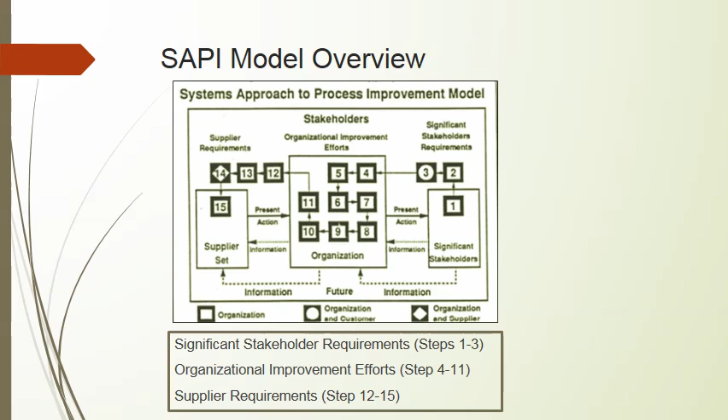So as Josh mentioned, the SAPI model is broken up into 3 distinctive sections. The first one being significant stakeholder requirements. And as he mentioned, we're going to be putting ourselves in Ford Motor Company's shoes and essentially walking through a year of process improvement that Ford might take to improve their F-150 platform.

So first of all, step 1 in the SAPI model is they need to identify and prioritize their stakeholders. Then they need to find out what those stakeholders' needs and wants are, and then develop operational definitions for producible quality characteristics. So when it comes to identifying those stakeholders, there's a number of internal and external stakeholders.

One being a primary customer, they're the end user. They're going to be the ones that are driving and owning the vehicle. There's the EPA, that's essentially the United States government Environmental Protection Agency. They have a number of requirements that they must meet from an environmental standard. And then there's the suppliers, for instance. They interface directly with Ford and provide the base materials that go into the Ford F-150.

So when it comes to, what does the customer actually want? For instance, they want a truck that's, 1, fuel efficient. It's got to be reliable. It's got to last a long time. And it also has to be safe. What does the EPA want? Ford needs to make a truck that meets emission requirements. It needs to meet sound requirements. It can't be too loud. That's especially in terms of the exhaust.

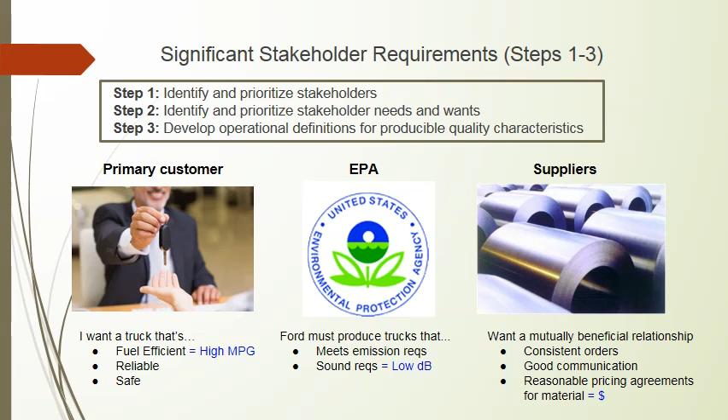The next section of the SAPI model is organizational improvement efforts, so that's steps 4 through 11. We just mentioned some quality characteristics on the last slide. One in particular that we're moving forward with is the primary customer's need for a fuel-efficient vehicle, and that translates directly into the quality characteristic of a high MPG, which is what they need for the truck.

So how does Ford affect miles per gallon as an organization? Well, there's a number of ways of doing that. There's looking for ways to affect driver behavior, reduce the curb weight. Essentially, that's looking for potentially other materials that might be lighter. Most trucks use steel. Ford could look into lighter materials such as aluminum and essentially replace all steel areas of the body panels. They could reduce the size of the engine.

Instead of a big V8 or even a V6, they could look into a fuel-efficient 4-cylinder, maybe turbocharged, while still regaining some of that power lost. They could look at improving combustion design, transmission design, and also aerodynamics. A lot of trucks are not always the most aerodynamic of shapes, so they could look for improvements there.

So at the end of the day, we're going to take a look at, okay, Ford needs to reduce curb weight for their F-150. That might be a big lever that they can easily pull to affect MPG as an organization. So in the next slide, we're going to talk about how we're going to develop operational definitions for producing those quality characteristics.

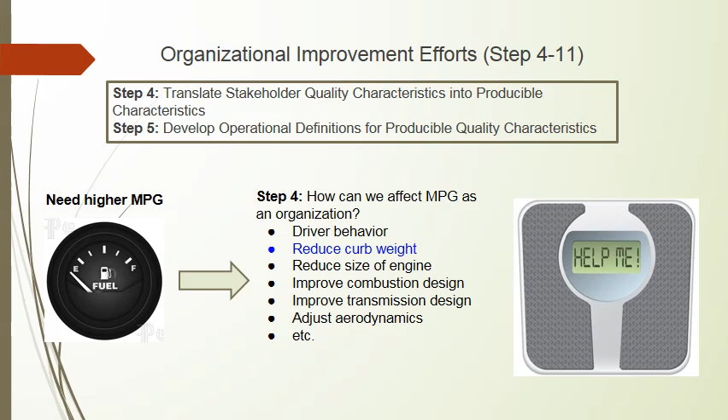So from step 4, we identified some quality characteristics that we can affect that would in turn affect miles per gallon and essentially increase the range of the F-150. But if we were to make those improvements, reducing curb weight, how would we know that we've improved? Well, we need to develop operational definitions for producing those quality characteristics.

So one way we could do that is essentially define criteria, a test that we could use to prove that we've met that criteria, and then we'd have a decision point: if we did or did not meet that criteria, what will we do next? So in the case of reducing curb weight and affecting miles per gallon,

for criteria, we need a percent improvement. So let's agree the percent improved MPG should be greater than or equal to 30.6%. This is essentially reflective of the 2015 CAFE fuel standard requirement that all trucks need to have a miles per gallon of about 23.5 mpg. That's a tough goal to hit, and that's something Ford's going to have to work toward, since in 2014 their combined mpg was around 18. So that's their goal, 30.6% between 2014 and 2015.

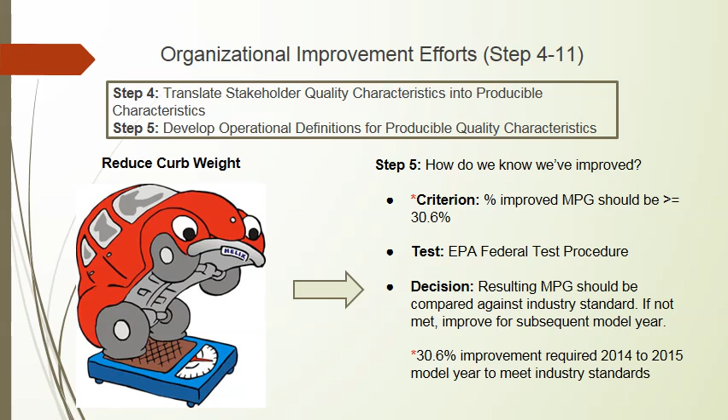Moving right along in the SAPI model, we're on to step 6, where we're identifying the process within which quality characteristics are produced. So we're moving forward with the idea of reducing curb weight. Where does that reside within the Ford F-150? Well, for shedding weight, we could take a look at the vehicle frame, vehicle body, the powertrain, interior components, and exterior accessories. So we're going to do a deep dive and perform a fishbone cause and effect diagram for the vehicle body.

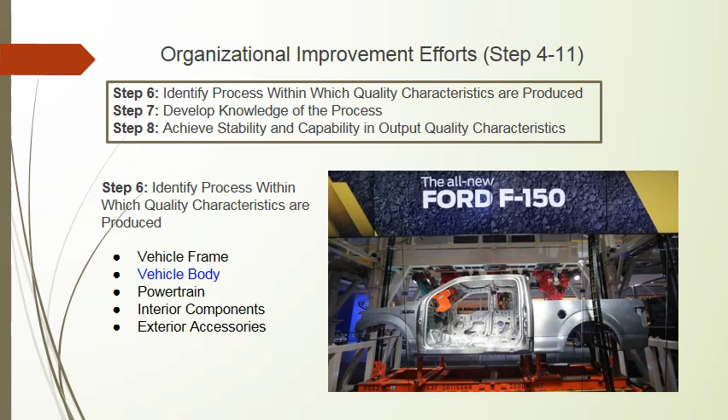Now that we've narrowed down to the vehicle body as the process that helps contribute to a large curb weight, it's time to move on to step 7, develop knowledge of the process. Said another way, what contributes to such a high curb weight in the process of building the vehicle body? A good way to map this out is to use a fishbone diagram or a cause and effect diagram. By concentrating on the 6 M's of man, machine, method, material, measurement, and Mother Nature, we can categorize all of the potential causes that lead to the effect of high vehicle body weight.

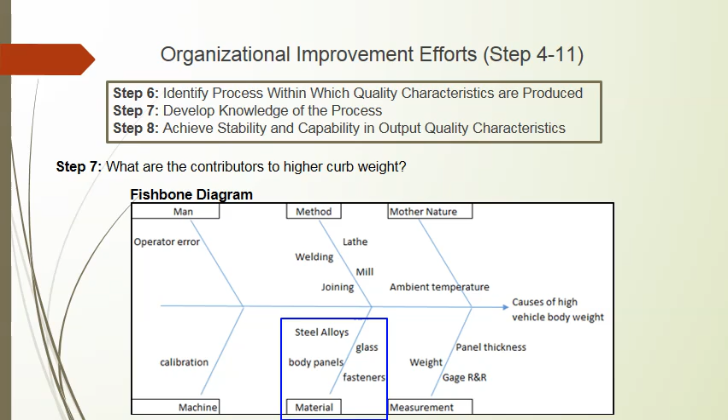Of these causes, one should consider what we truly have control over and what would really influence this outcome the most. And for the purposes of this case study, we've narrowed into the material side, saying that the steel alloys, the glass, and the fasteners, all within the body panels themselves, add significant weight to the vehicle body.

After developing knowledge of a process, it's important to see if that process can achieve stability and capability in the output quality characteristic that you've defined. Now, for this specific example, we don't have minute data of either body panels or curb weight from a sample of data. However, we do know the spec listing for each model year, as shown in the graph on the chart.

So you can see that between 2000 and 2015, there are a few variations in what the curb weight is, both the minimum and the maximum, based on introductions of new body styles in 2004, 2009, and then in 2015. This is a bit of jumping to the result, but in 2015 data, you can see that Ford has taken all of their steel panels for the body of the F-150 and converted it into aluminum, thus proving that they've got a stable and capable process of reducing weight.

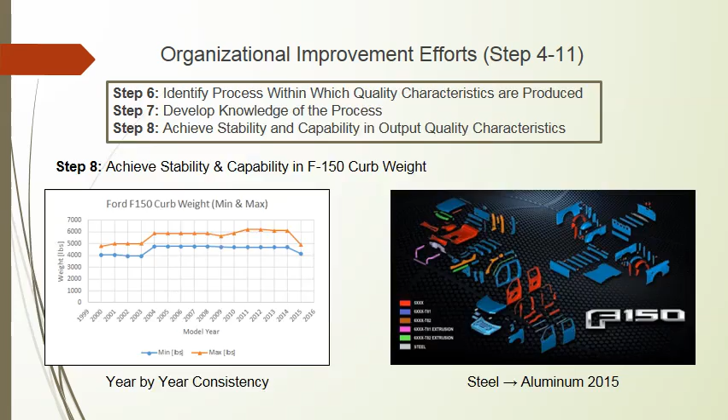After narrowing this scope down to vehicle curb weight, and even further to say that the body panels on the Ford F-150 contribute a significant amount to the total curb weight, we then move on to step 9, translating that output quality characteristic into a process quality characteristic. For this effort, we've selected the specifications themselves on body panel size as being a contributing factor. Length, width, different material strength properties that might be called out in specification are all well maintained in a process that could contribute to the final value of weight.

Moving on to step 10, there needs to be a development of operational definitions for these characteristics in order to ensure that everyone's speaking the same language, communicating effectively to one another, and create a producible and repeatable process. For step 11, achieving stability and capability in that process quality characteristic, we would typically create a run chart or a control chart to show whether or not current capability is within specified limits.

As we don't have any data from Ford ourselves, we did some research and found information from a University of Michigan study based around sheet metal stamping for automobile doors. Although they did not specify a corporation, we can assume that the same types of errors found in this study might be present in Ford, and they would have to do something very similar to achieve completion of step 11.

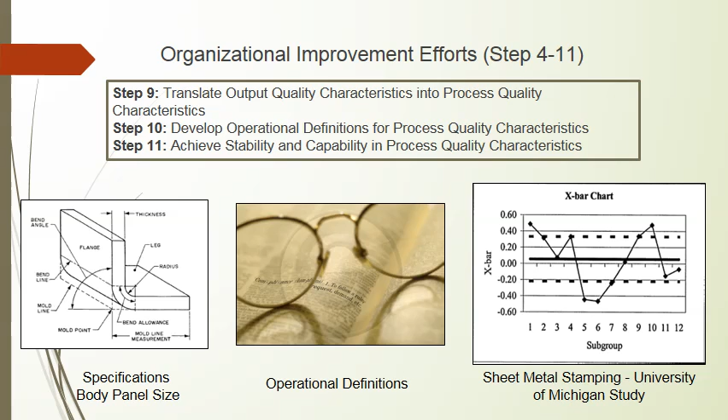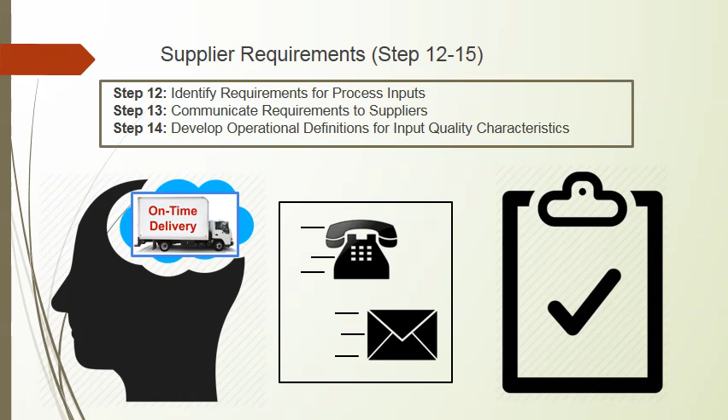For the 15th and final step of the SAPI model, Ford needs to ask their suppliers to perform steps 4 through 15 themselves, essentially performing organizational improvement efforts while identifying and working with their own suppliers to look inward and identify improvement opportunities. So in the end, Ford, along with their suppliers, need to always continuously improve, satisfy the stakeholders, and reevaluate their priorities constantly.

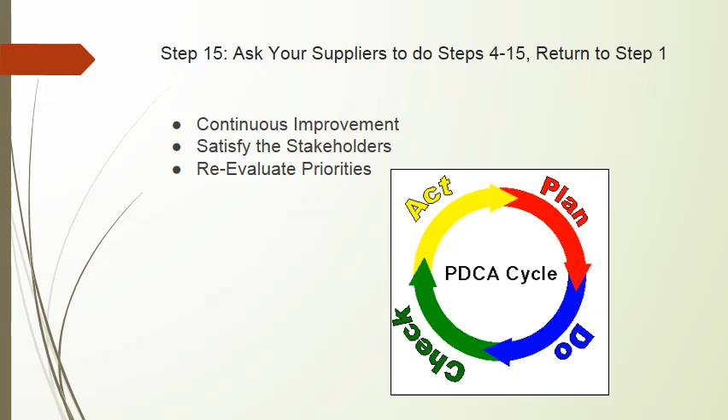After completing this case study, we found that Ford F-150 has room for improvement in achieving a fuel efficiency level that would satisfy their end customers. On that note, we'd recommend that Ford would find a way to reduce the overall weight of their F-150 model pickup truck to help satisfy that requirement. As it turns out, in 2015, Ford did just that. They switched many of their steel panels in the body of the truck to aluminum, significantly reducing weight, approximately 700 pounds averaged across all the different models they produce.

It also showed a significant fuel efficiency gain in isolation, and additionally, there are several other engine options using technology such as turbochargers and just smaller overall size to help boost efficiency as well. In conclusion, Ford is clearly using a model, if not identical to the SAPI model, very similar, and they've been achieving continuous improvement in making a higher quality product to satisfy their customers.